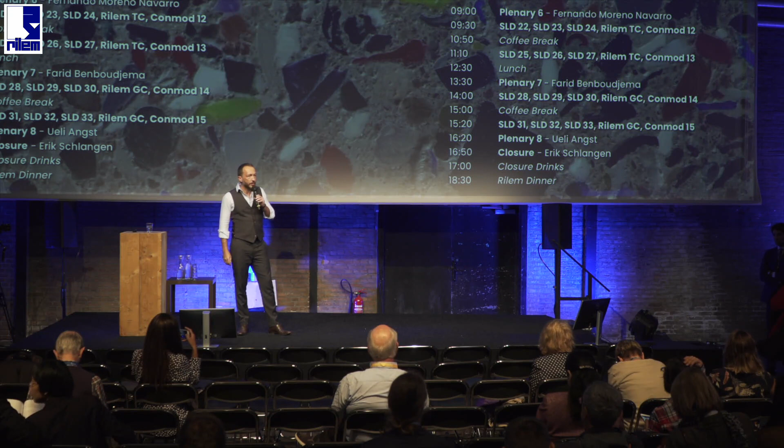It's a very special lecture for RILEM because it's given by the 2018 L'Hermite Medalist. In RILEM we have 3 major awards attributed on scientific criteria. Two of them are the Colonnetti medals, attributed to researchers below the age of 35, given during the spring meetings of RILEM. And we have the most prestigious award, the L'Hermite Medal, that will be given today. These awards are quite historical, at least for the L'Hermite medal. It has a long history of very famous names.

Today we have the pleasure of having someone who is from the asphalt and bitumen community. The cluster convener of asphalt and bitumen in RILEM made me notice the other day that it was the first time we have someone from the asphalt and bitumen community receive this award. Although we had some amazing experts in RILEM, it's the first time it's given to someone from this community. And it can be noted that this year in the jury of the medal there was no one from the asphalt and bitumen community, so it was attributed by people from cement, which tells a bit about how outstanding the academic production of this year's L'Hermite Medalist is.

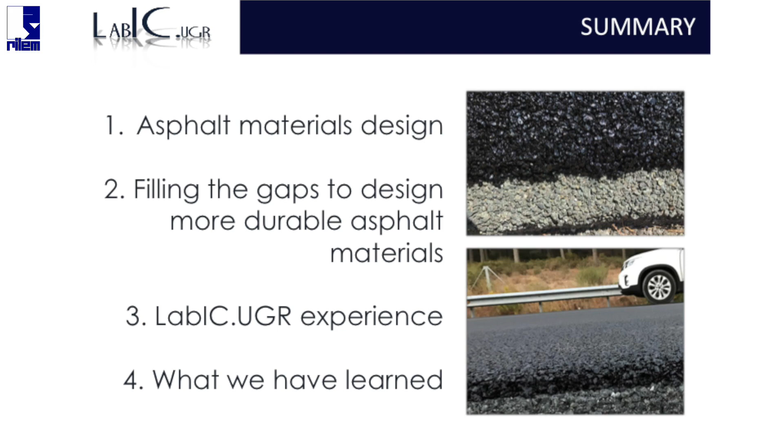The title of my presentation is Designing More Durable Asphalt Material, and the structure will be divided into 4 different sections. As an introduction, we are going to talk about asphalt material design. Then I'm going to tell you how I have tried to fill the gaps to obtain more durable asphalt material. After that, we are going to tell you about some of the experience carried out on this issue in the Laboratory of Construction Engineering of the University of Granada, where I work. And finally, as a conclusion, we are going to talk about what we have learned from that experience.

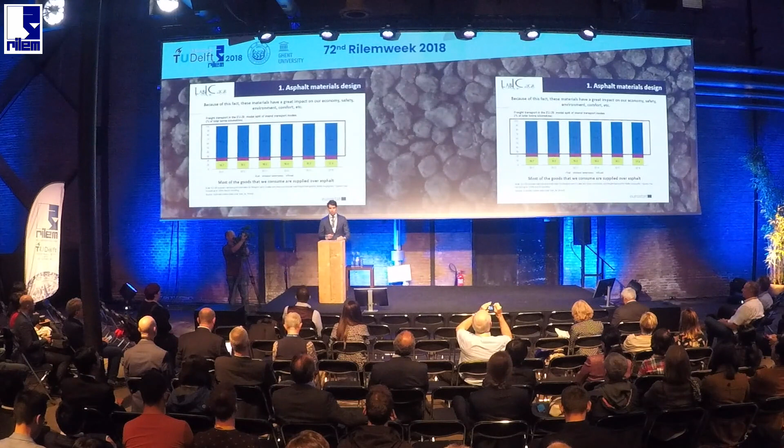We use asphalt materials every day, even without realizing it. Most of the pavement infrastructure that supports our social and economical development is constructed using this type of material. Indeed, more than half of the urbanized surface in developed countries is covered by asphalt. So it can be considered one of the most important construction materials, and because of this fact, it has a great impact on our life.

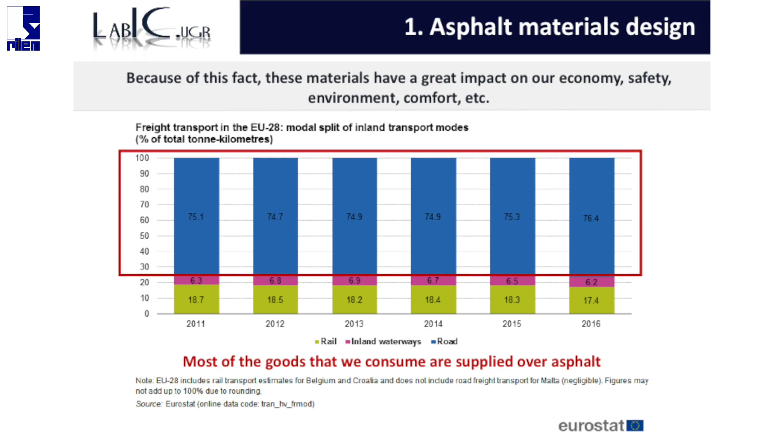Most of the goods that we consume arrive to us over asphalt. Our countries invest a lot of money every year on this material. It has a great impact on our safety every day and also on our environment. So for us, it is crucial that asphalt material offers good performance and also good durability.

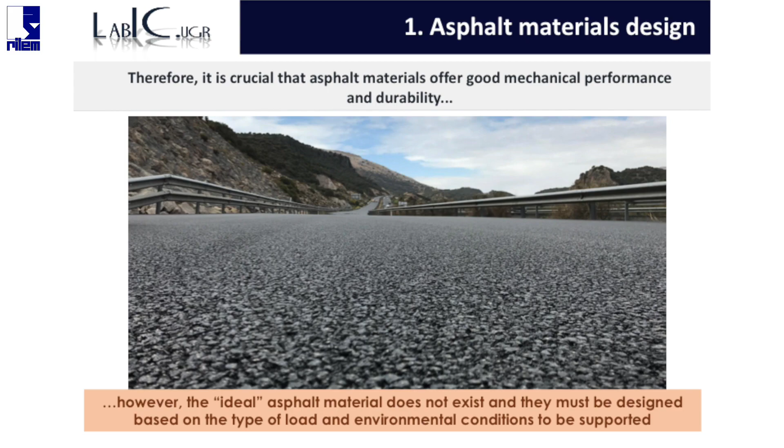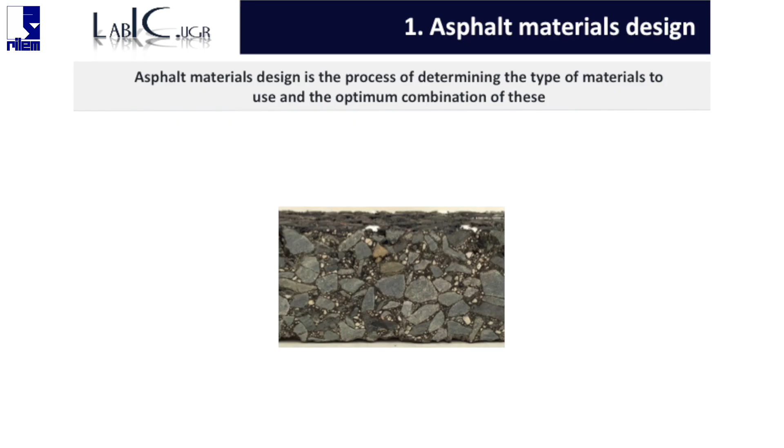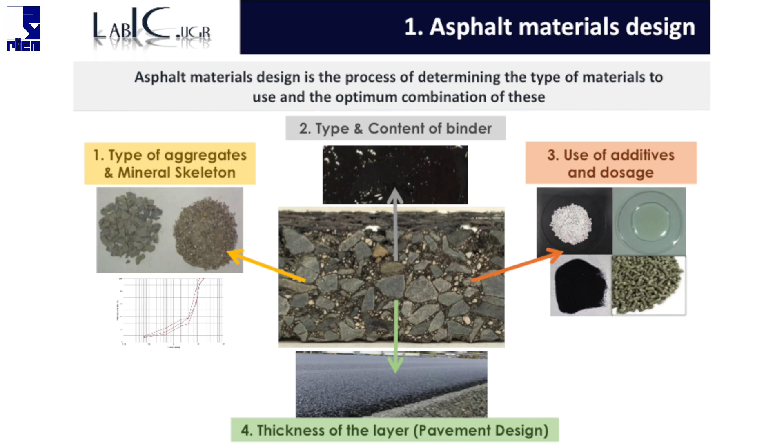Nonetheless, the ideal asphalt material does not exist, so it must be designed based on the type of load and environmental condition to be supported. To design asphalt material is the process of determining the type of material to be used and the optimum combination of materials. Basically it can be divided into 4 different steps: to determine the type of aggregate and mineral skeleton to be used, to define the type and content of binder, to decide whether to use any additive or dosage, and finally to determine the thickness of the layer. It seems a simple task, but indeed it is not, because all these variables are related, and the relationship between them is not univocal and depends on many external factors.

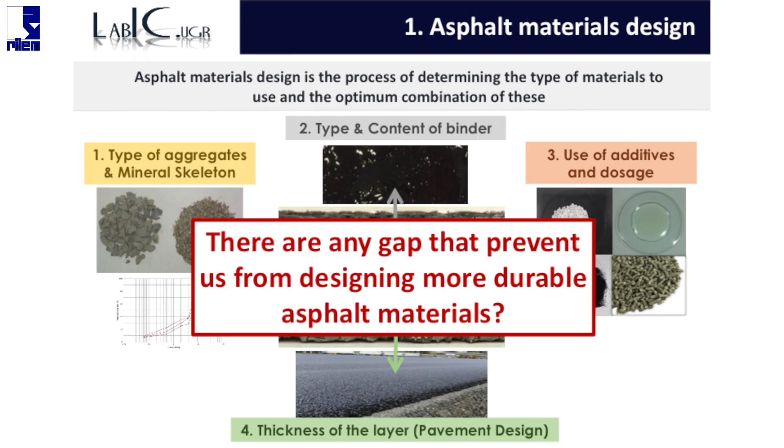Several years ago, when I started to study asphalt material, I wondered if there were any gaps preventing us from designing more durable asphalt material during the design stage. And the first thing that I noticed is that most of the loads supported by asphalt material during the service life are cyclical loads that after a certain number of repetitions cause their failure.

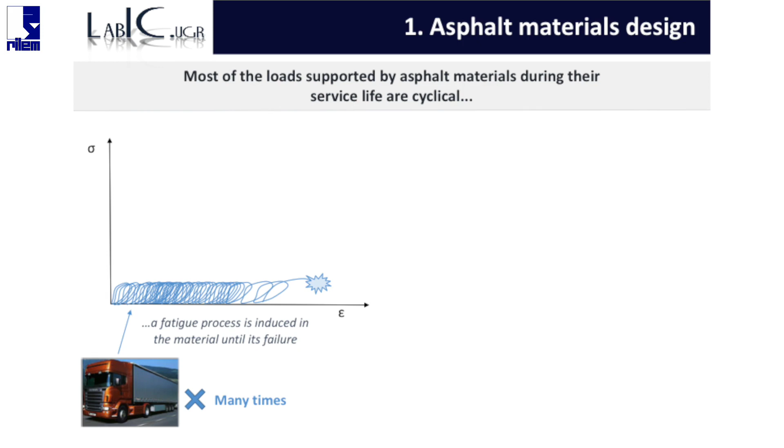Nonetheless, most of the tests used during the design stage apply monotonic loading. These tests are useful, but sometimes they are not sensitive enough to justify small increments in the binder content or the use or not of additives and modifiers.

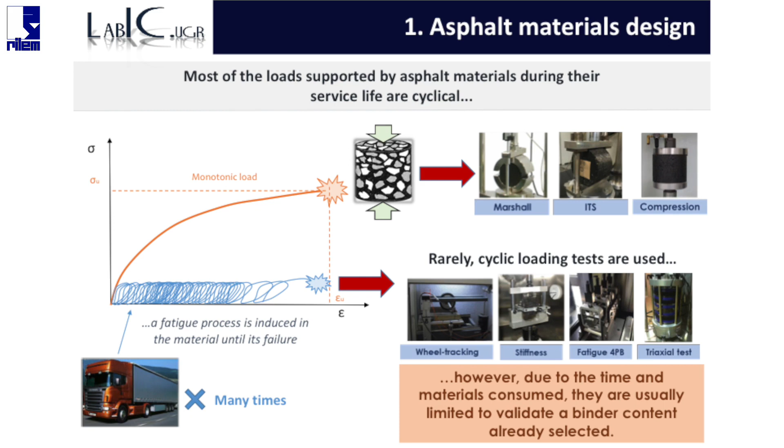Rarely, cyclic loading tests are used during the design stage, and due to the time and material consumed on this type of test, they are usually limited to validating a binder content already selected with monotonic tests.

In addition, most of the tests used when designing asphalt material do not apply similar complex effort to those supported by this material during their service life. Most of the tests apply single efforts such as bending, tensile, or shear, but not a complex state like shear plus bending or plus tensile, as occurs in asphalt material.

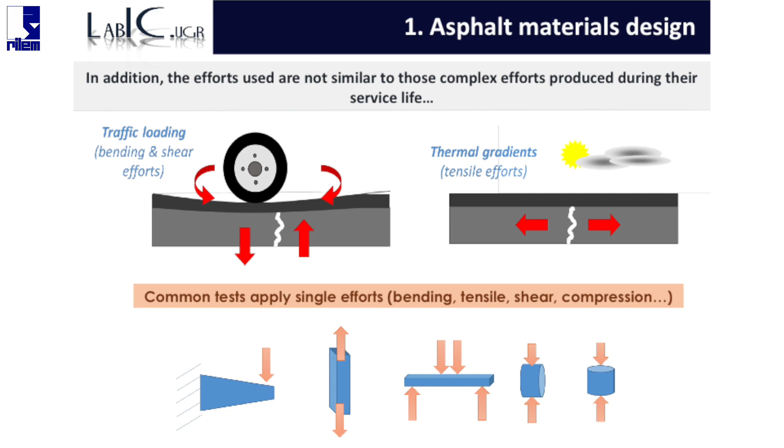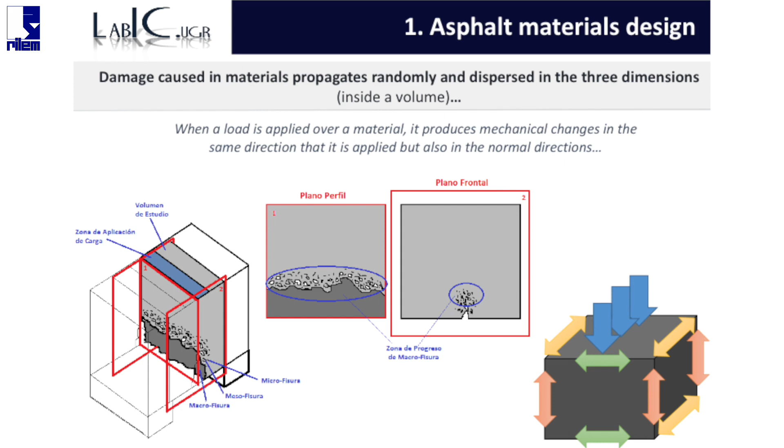Materials do not have a unidirectional propagation of damage. When you apply a load over a material, it will respond with mechanical change in the same direction as the load, but also in the normal direction. Because of this, damage propagates randomly and aleatorily inside the volume of the material.

Nonetheless, most tests measure the change produced in the material in just one direction. Because of this, it is not possible to have an accurate measurement of the propagation of the damage. These aspects reduce the repeatability of the test and also reduce its sensitivity to changes in the material design.

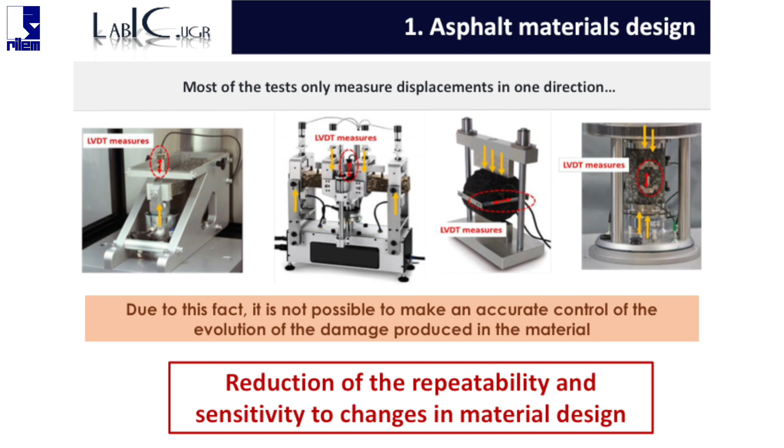Another aspect that prevents us from having an accurate measurement of the propagation of damage in asphalt material is that most analysis of results uses linear elastic mechanics. Asphalt materials are far from behaving like a linear elastic mechanic.

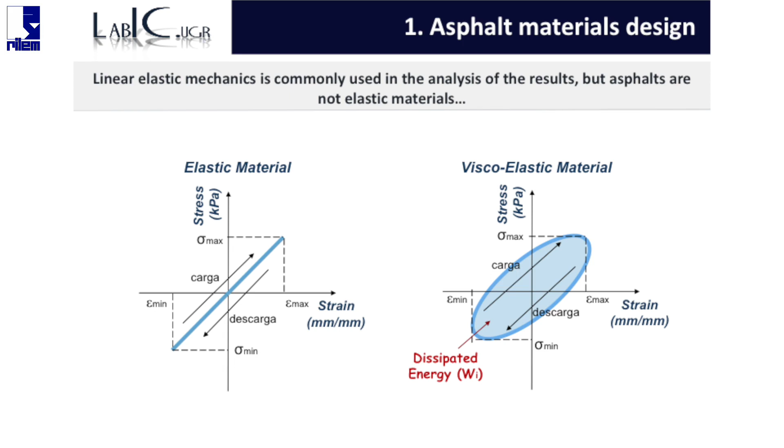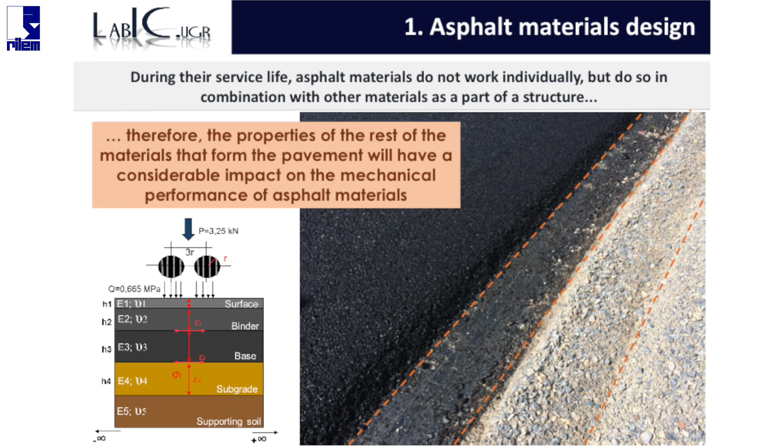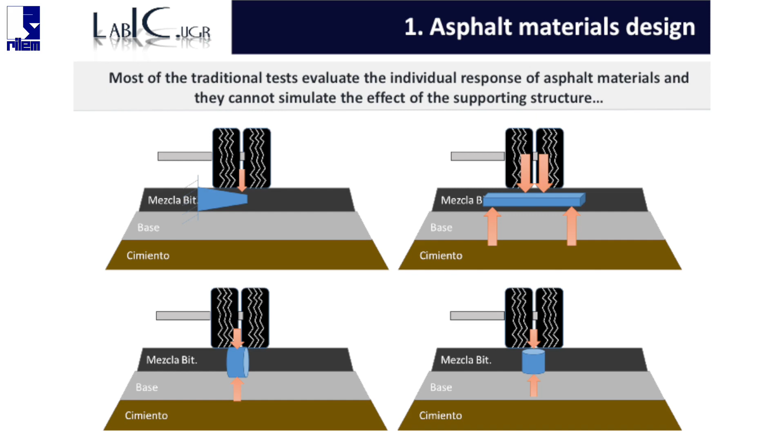In the end, I noticed that during their service life, asphalt materials do not work individually. They form part of a complete structure, and the properties of the other materials in the structure have a great influence on the final mechanical response of asphalt material. Most traditional tests evaluate asphalt material as an individual material without taking into account the effect of the supporting structure.

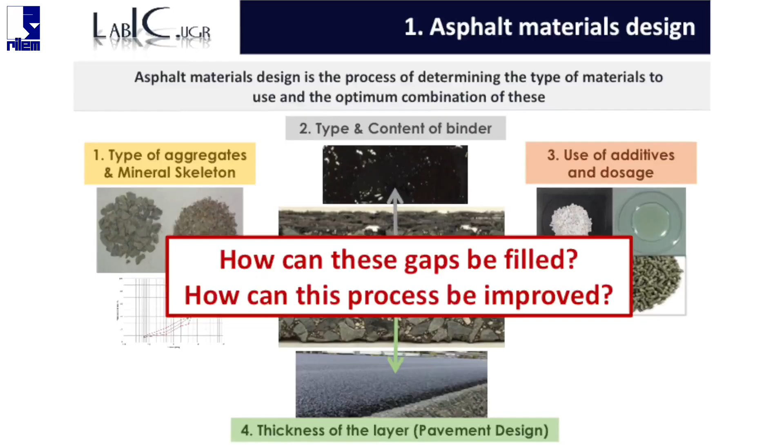So when I finished this analysis, I wondered: how can this gap be filled? Or put another way, how can this process be easily improved? I decided to develop the University of Granada Fatigue Asphalt Cracking Test.

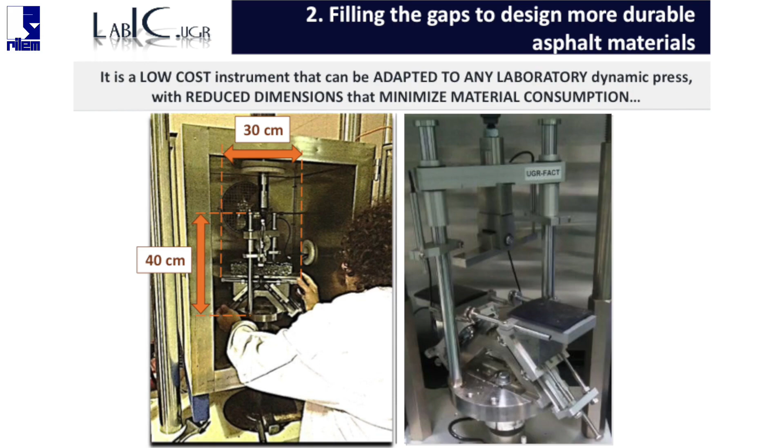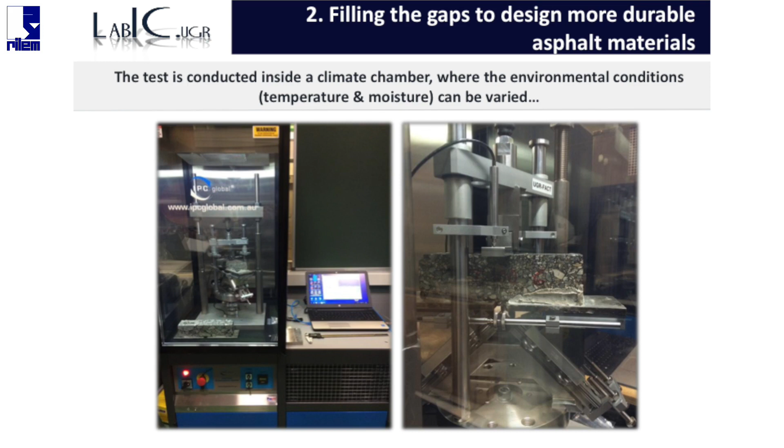This is an instrument. This is a low-cost instrument with reduced dimensions that can be adapted to any laboratory dynamic press, and it has low material consumption. The test is carried out inside a climatic chamber where the environmental conditions of the material can be changed, and it can reproduce similar complex effort to those produced in asphalt material during their service life.

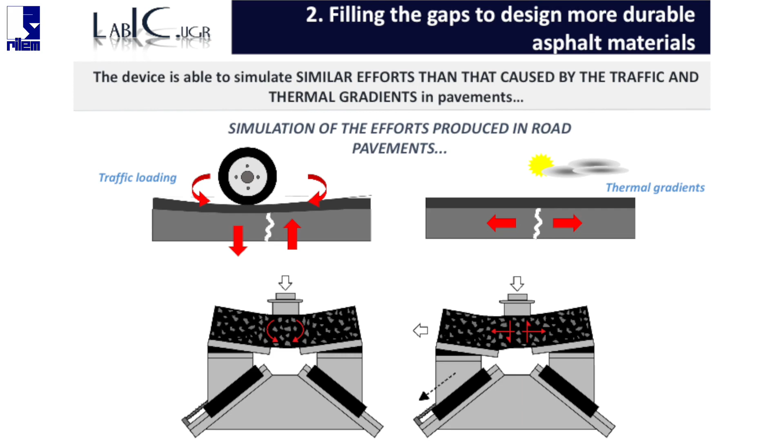For this purpose, this test is composed of a base where two supports are placed, and over that support there are two places where the specimen is fixed. Under that place there are two elastic elements that, when we apply a load like a traffic load, allow for the bending of the asphalt material.

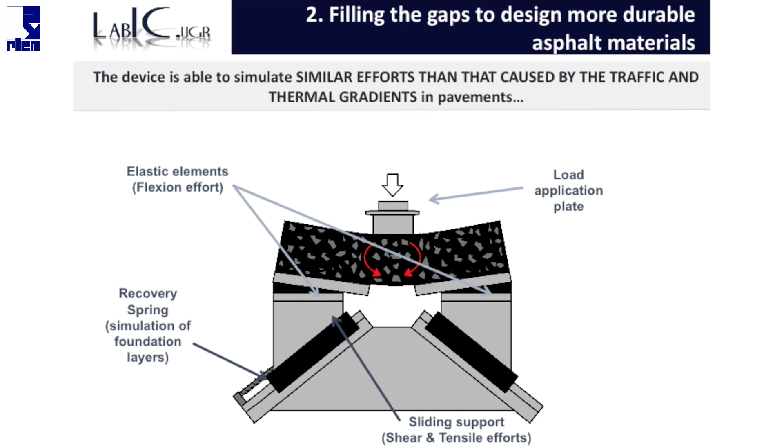After that, one of the supports is fixed and the other one can move. So when the bending moment is reached, the sliding support moves, inducing shear and tensile effort inside the volume of the material that we are evaluating.

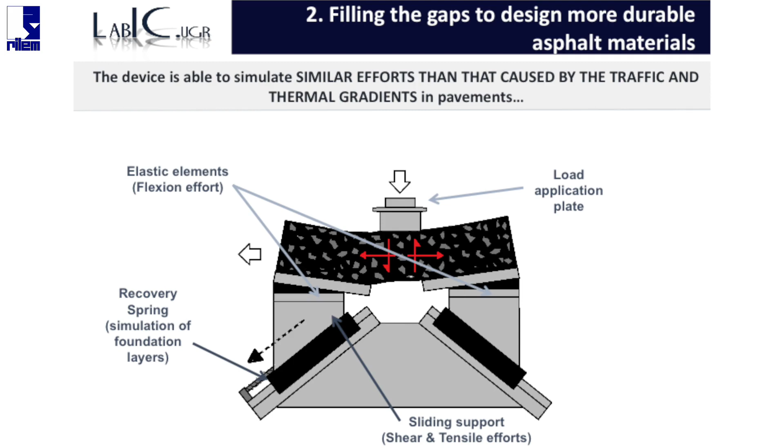We have a recovery spring that simulates the foundation layers in the material. So basically, this is an overview of the University of Granada Fatigue Asphalt Cracking Test. Here you can see the elastic elements, the recovery spring, and the sliding support.

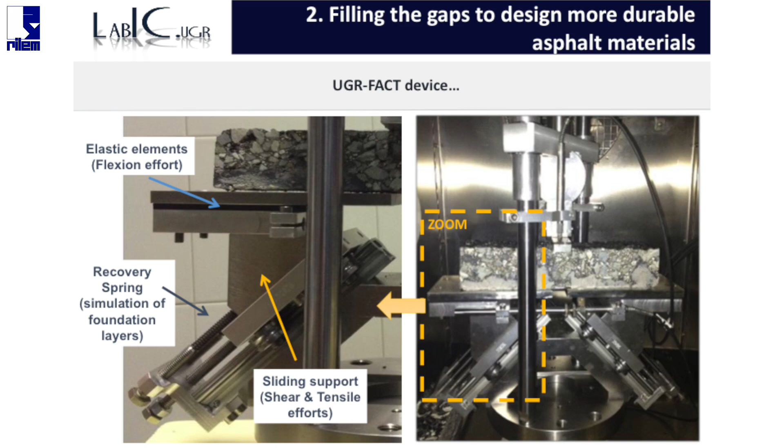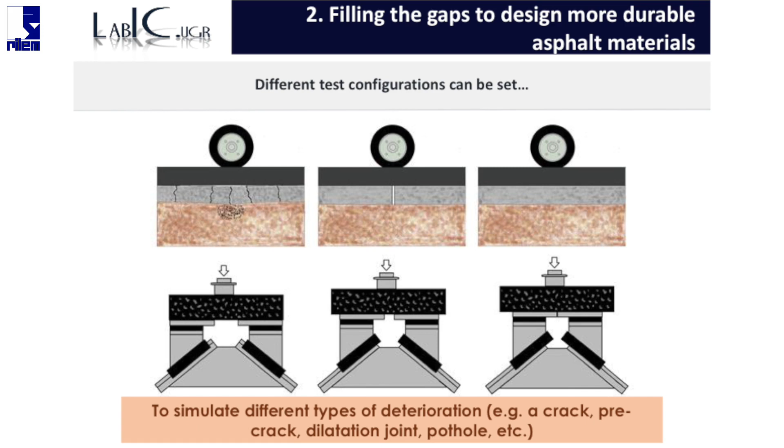The test can have different types of configuration by varying the distances between the plates, so we can simulate different types of deterioration under the asphalt layer, like cracks, pre-cracks, dilatation joints, potholes, etc. In addition, the presence of the recovery spring allows us to simulate different types of base and foundation material.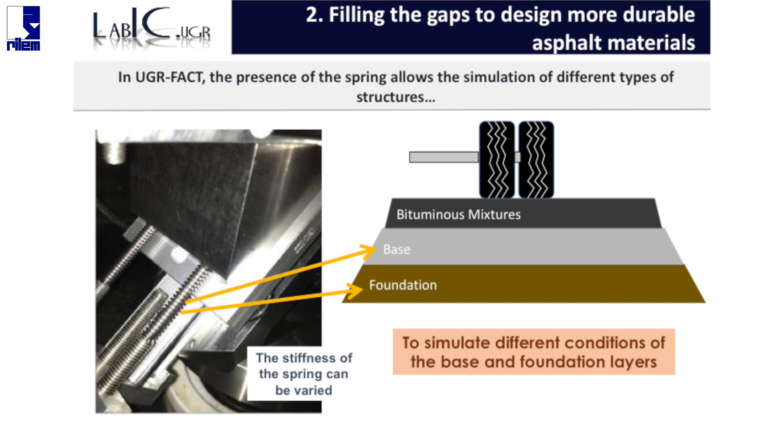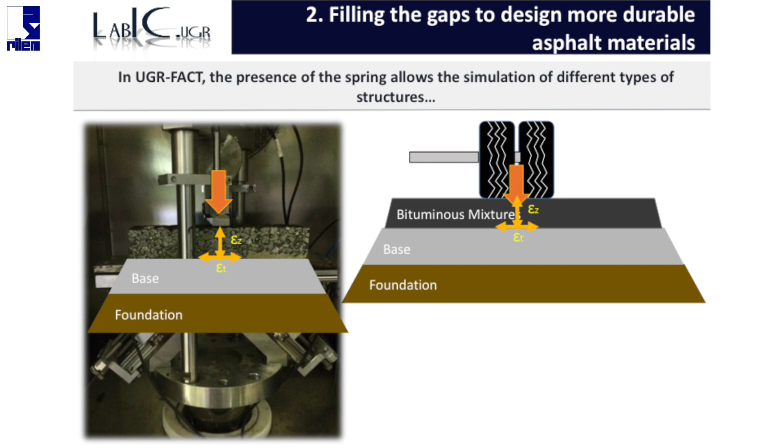So when we apply loads on our material, as occurs normally, we are going to have deformation on it. But if the characteristics of the foundation change—for example, we have a weaker base or a weakened foundation layer—the deformation becomes bigger. So the only thing we need to do is change the stiffness of the spring, and we can reduce and simulate different types of bases.

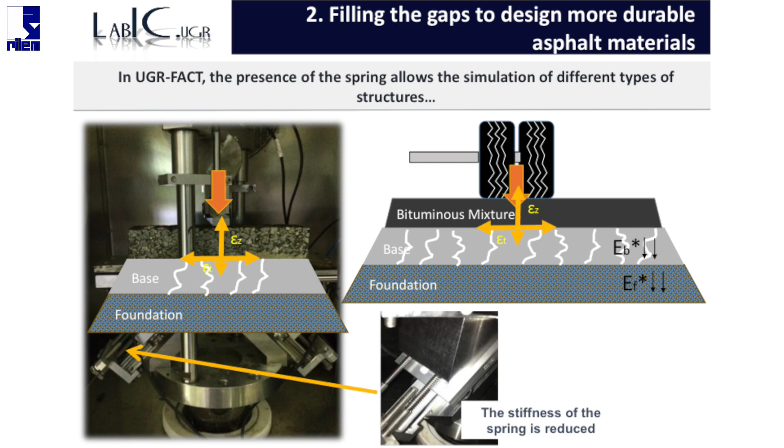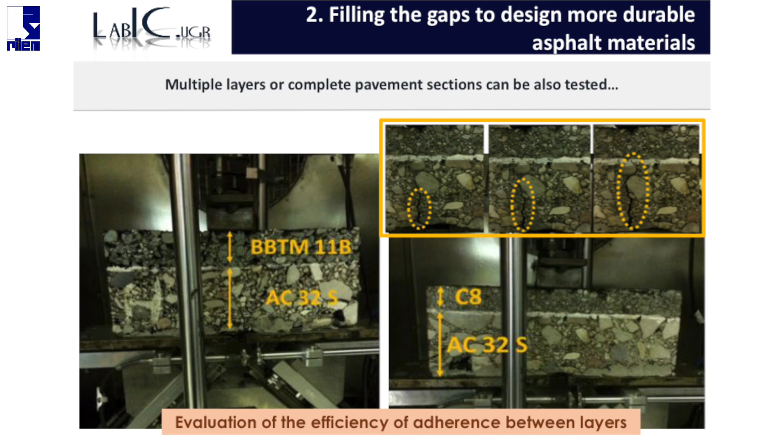This type of test also allows us to evaluate a complete pavement layer or several layers of the pavement, evaluating the efficiency of the adherence between layers, and also the use of geotextile or other reinforcing materials between the two layers of asphalt.

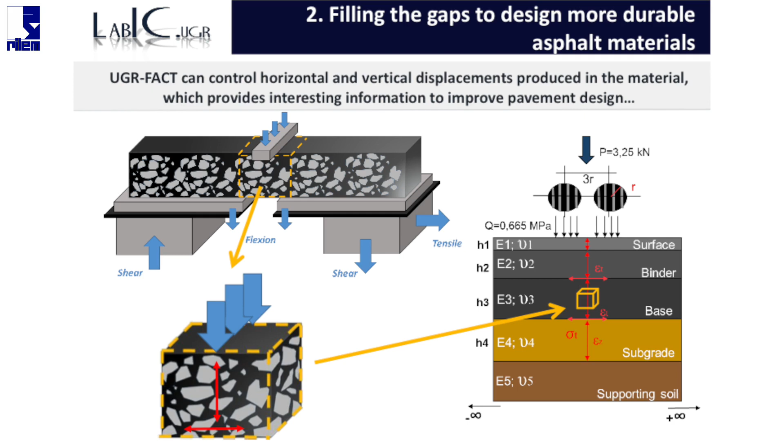In addition, it offers very valuable information for improving asphalt material design in a structural way, because we record every horizontal and vertical movement produced in that volume due to different types of load and base characteristics.

For this purpose, the UGR FACT is provided with 4 LVDTs. Two of them measure the displacement produced in the vertical direction, and the other two measure the displacement produced in the volume in the horizontal direction, one on each side of the specimen.

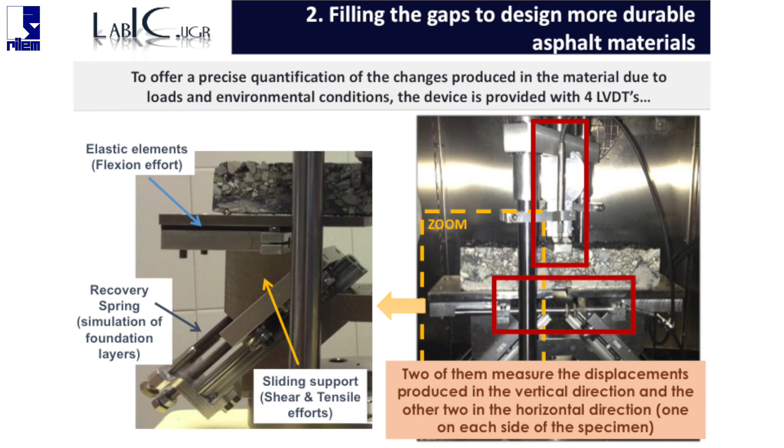This configuration allows us the evaluation of the material inside a volume, avoiding its randomness and the 3-dimensional dispersion of the damage produced in the material during the test.

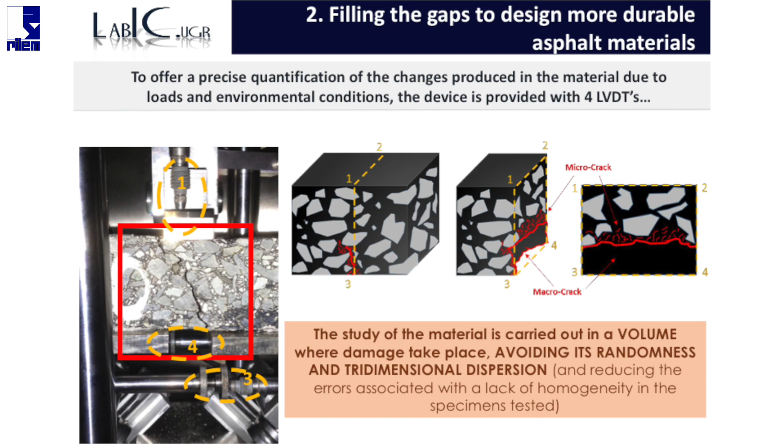Taking that information, what we do is record every relative displacement produced in the asphalt material in both directions, vertical and horizontal. These displacements are typically recorded in all types of tests and are related to the consistency of the material or the damage state. But in addition, we also record every single permanent displacement produced in the material, which is related to the change produced in the geometry of that volume.

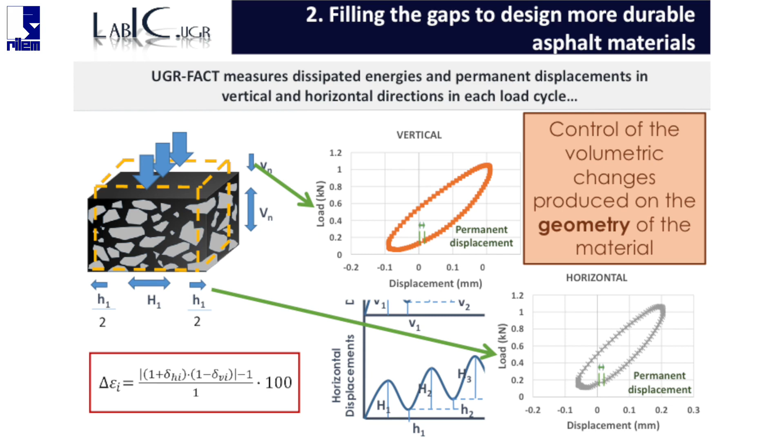By combining both pieces of information, we can obtain a control of the volumetric change produced on the viscoelastic response of the volume, but also the control of the volumetric change produced in the geometry of the material due to the permanent deformation. So combining these two parameters, we can have an accurate measurement of the real mechanical response of this material.

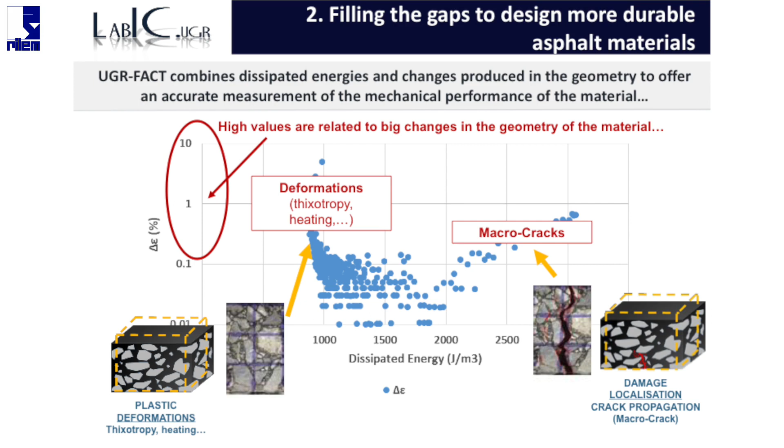For this purpose, we put on the x-axis the dissipated energy, and on the y-axis the change in the geometry. When we obtain a big change in the geometry of the volume, that corresponds at the beginning of the test to plastic deformation or other viscoelastic phenomena, and at the end of the test to macro cracks. When we obtain low values of this change in the geometry of the volume, we have a stage where microcracks, small variations of geometry, are being produced inside the volume.

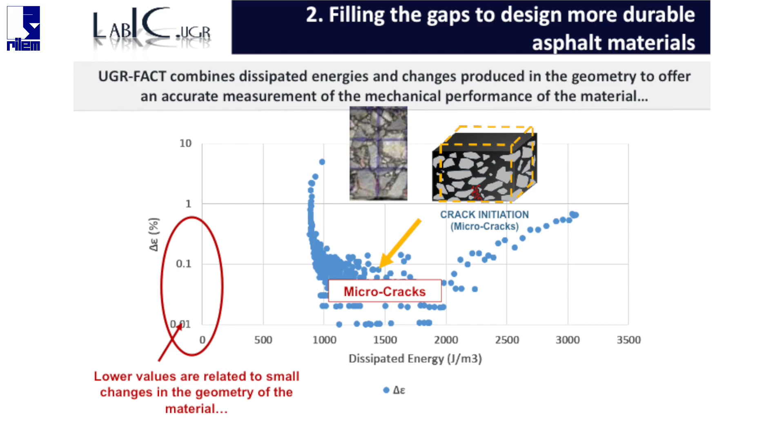Analyzing the dissipated energy, we can observe that the initial dissipated energy is related to the viscoelastic response of the material under the condition we are testing. Low values of the initial dissipated energy are related to a more elastic response, while high values are related to a more viscous behavior of this material.

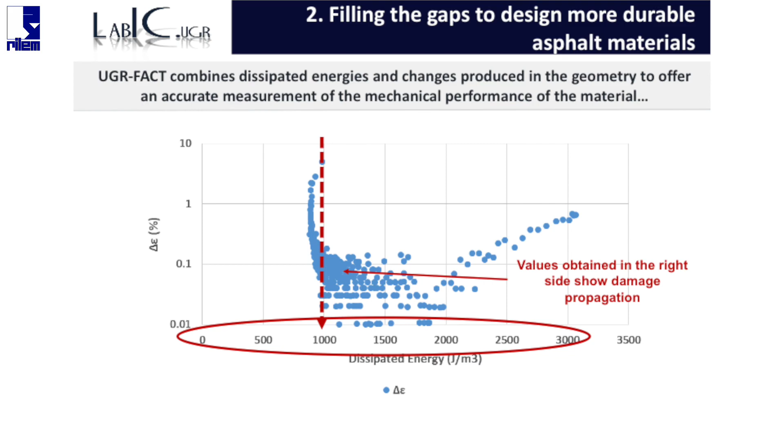During the test, if the values of dissipated energy go to the left side, toward the initial dissipated energy, we can observe that the material is suffering a strain hardening process due to plastic deformation. If they go to the right of the initial dissipated energy, that means the material is suffering damage.

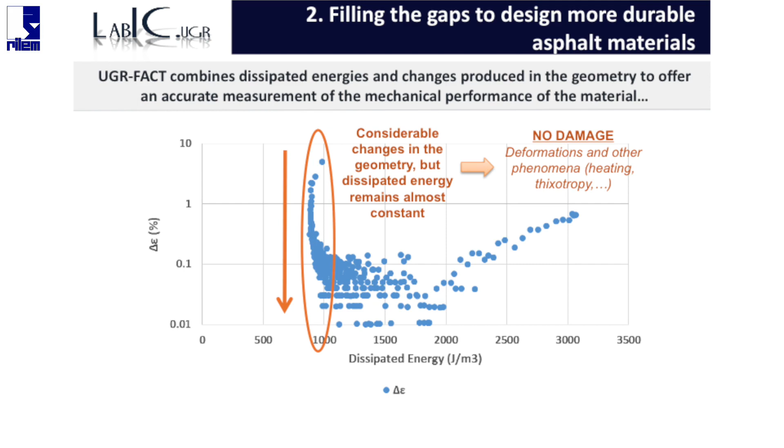Basically, at the beginning of the test in all tests, we can observe a considerable change in the geometry of the material. Consider that this is a logarithmic scale, so we see a considerable change in geometry, but the dissipated energy remains almost constant. That means there's no damage in the material, and the deformation we are controlling is only due to plastic deformation or other viscoelastic phenomena such as heating or similar.

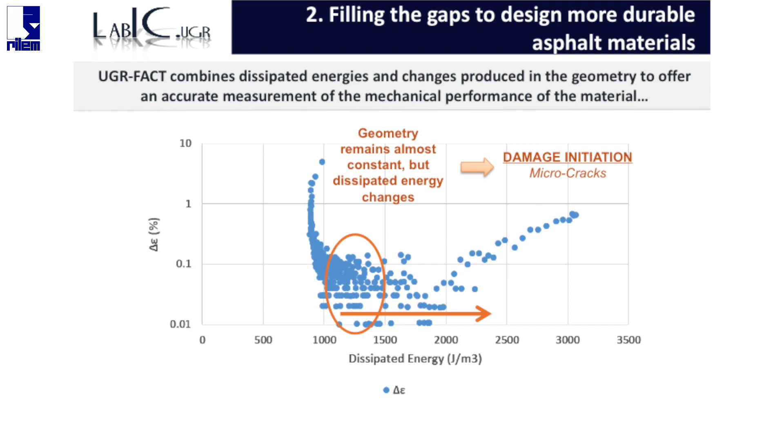Then we have a second part where the change in geometry becomes very low and the dissipated energy starts to grow. That means we are in the damage initiation phase. In the end, the last part, geometrical change starts to grow again, and dissipated energy also grows drastically. That means we have the damage propagation stage.

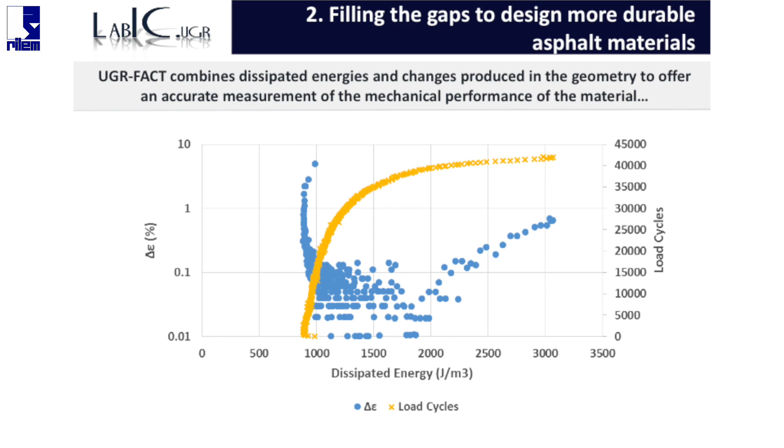If we combine this information with the number of load cycles applied that produce it, we can identify many different properties inside our material. For example, the deformation susceptibility, because we have the number of cycles that does not cause real damage to the material, just deformation. But we can also distinguish between the different phases of the propagation of real damage, the micro and the macro process.

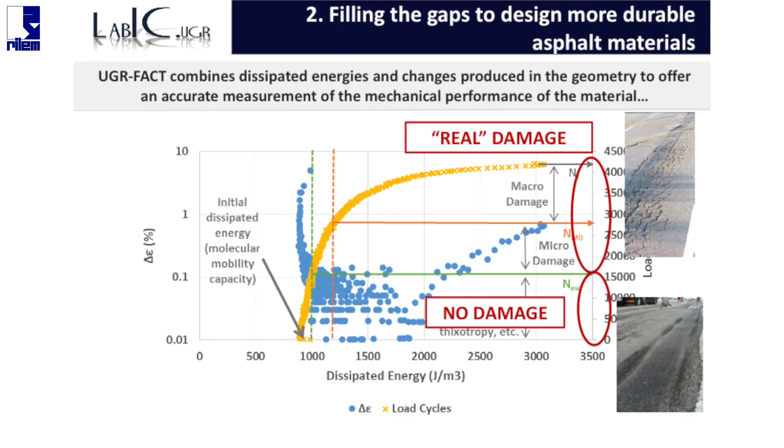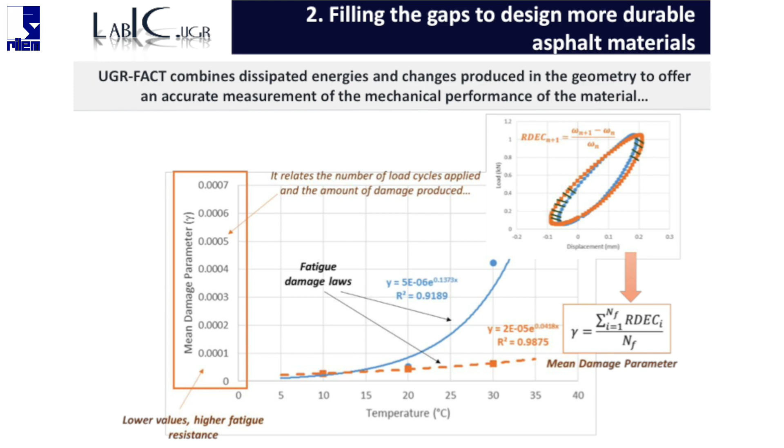Taking that information, we can define the mean damage parameter, which is a summation of the increment of the dissipated energy produced in the material during the test, divided by the number of load cycles needed. By varying the temperature condition or the load condition used to evaluate the material, we can obtain fatigue laws that help us design more accurate asphalt material.

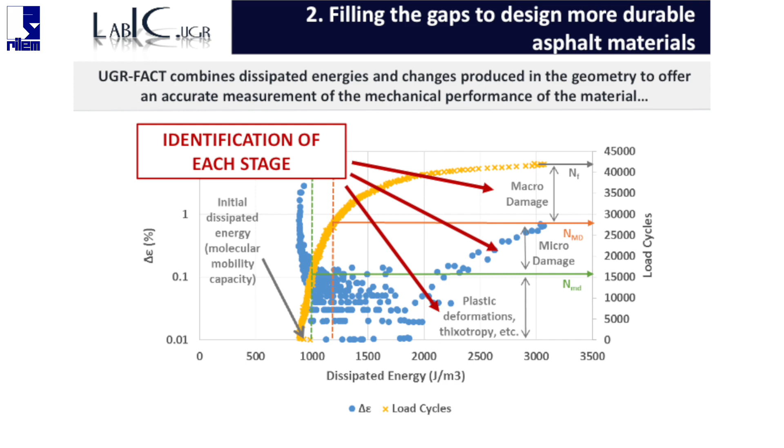So basically, with this test, we can easily identify each of the stages of the mechanical performance of the material and use them to identify the benefits produced by additives or bitumen modifiers in each of those stages.

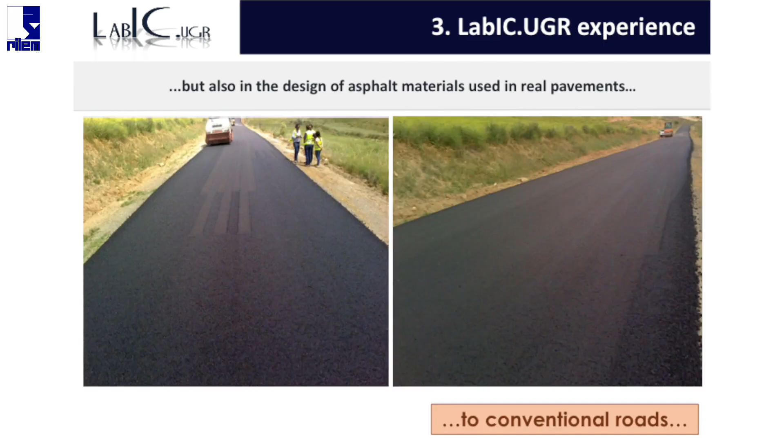The Laboratory of Construction Engineering of the University of Granada has used this tool during the last 8 years successfully in fundamental research, but also in the design of real asphalt material in pavement, from urban solutions to conventional roads, and also in highways. Because of that, I will show you the potential of this tool in different stages.

Starting at the beginning, the design stage in the laboratory, I will show you the sensitivity of this test to design variables such as density, voids, binder content, binder type, or the use of additives. For that purpose, I will show you an example with a BBTM mixture, which is a common mixture used in surface layers in highways in Spain, and a Spanish standard gives the recommendation to design it.

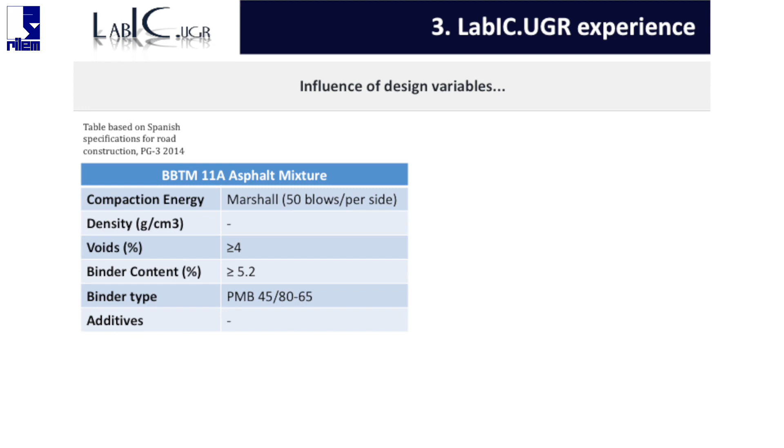The compaction energy must be 50 blows per side in the Marshall compactor. The minimal void content must be 4%. The minimal binder content must be 5.2%. And the binder to be used should be a polymer modified binder 45/80-65.

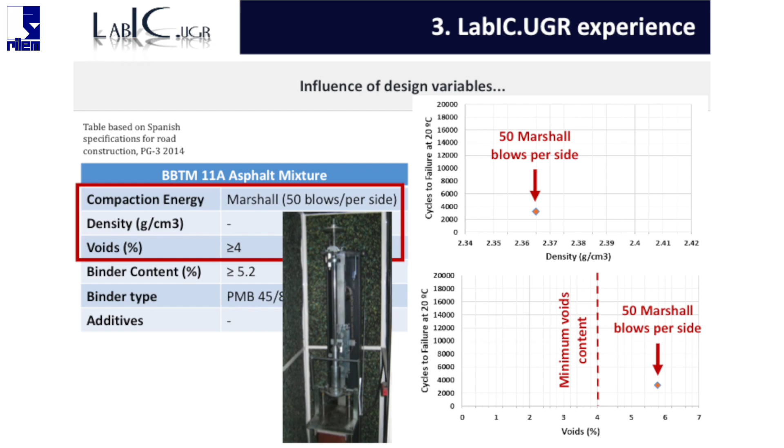If we start to design a material under that criteria, we can apply 50 blows per side, and we are going to obtain a material that has around 6%, for example, that accomplishes the criteria, with a density and a resistance in the fatigue asphalt cracking test of around 3,000 cycles.

That's okay, but if we change the compaction energy used in the material, it is observed that as the density increases, the mechanical resistance of the material increases. That means not all asphalt materials, not all additives, will have the same compaction energy. So we need to focus on trying to obtain the maximum density while respecting the void content of the material. Just by changing the void content of the asphalt material by 2%, we can increase its service life by 70%.

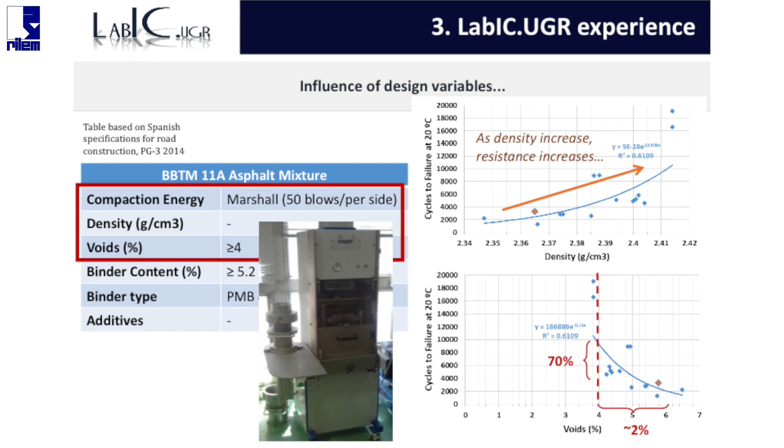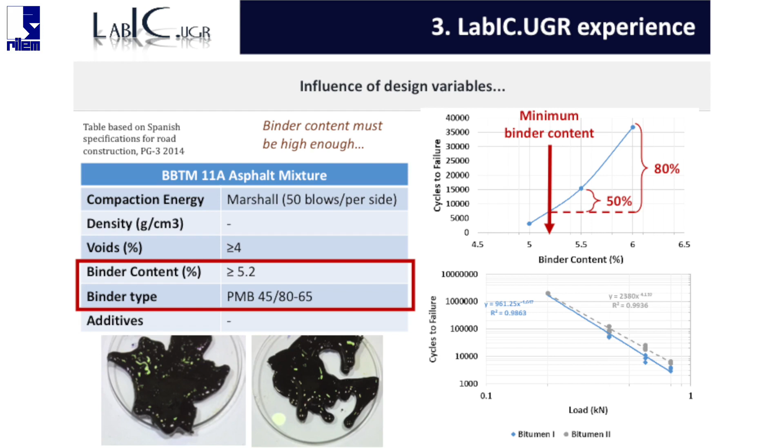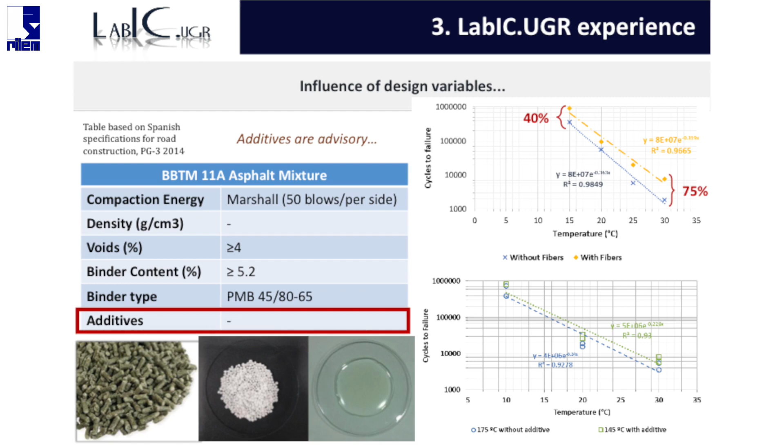In the end, additives are usually not advised when designing asphalt material because it increases the cost. But definitely, if you use additives like fibers, you can drastically increase its mechanical performance and service life. Also, if you use other additives like waxes or surfactant materials, you can reduce the manufacturing temperature while still obtaining good mechanical performance, because the material improves its workability and can be densified in a better way.

The second potential that I want to show you from this test method is that it is very useful to determine the thickness of an overlay or the thickness of a pavement layer to be used. Right now our road network is almost constructed, and we are going to have many activities on the rehabilitation of this type of road.

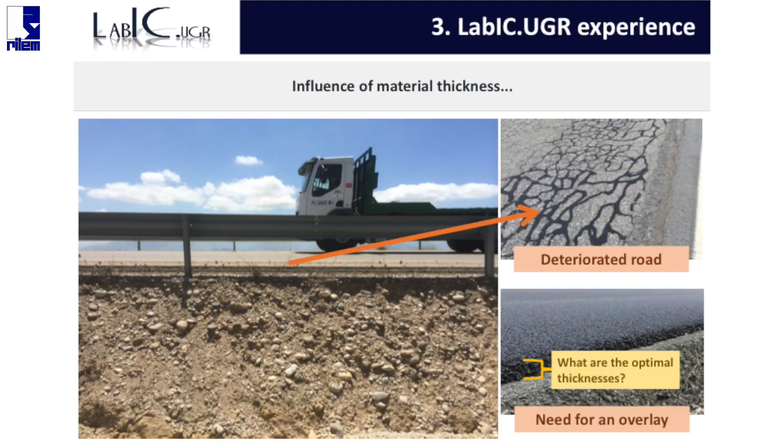We are going to have a deteriorated road that needs an overlay. But the typical question is, what is the optimal thickness to be used, or which is the optimal material? What we do is determine the type of load the road will support, and the characteristics of the road. Then we can adapt that to the University of Granada fatigue asphalt cracking test, and test different types of materials and thicknesses at different temperatures in order to obtain the optimal thickness to be used.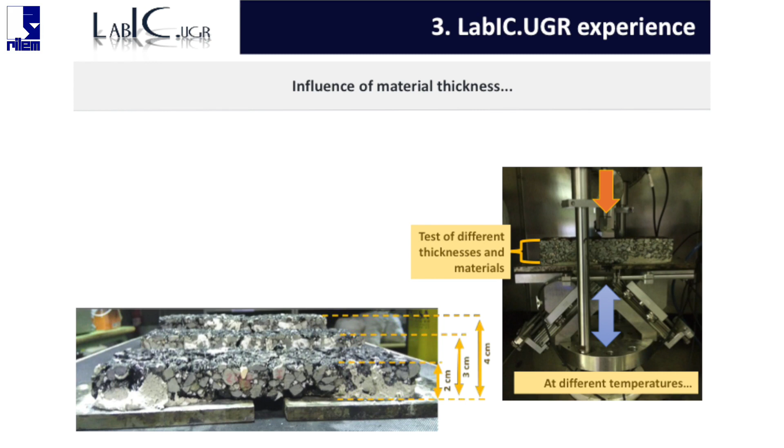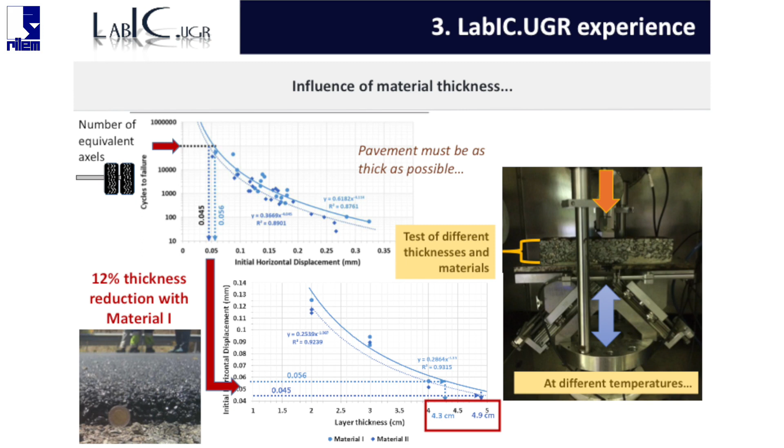For sure, if you want a durable asphalt pavement, it must be as thick as possible. Nonetheless, when comparing between two types of material, you can obtain a significant reduction in thickness when using one material or the other, which gives us another criterion to select the optimal material during rehabilitation.

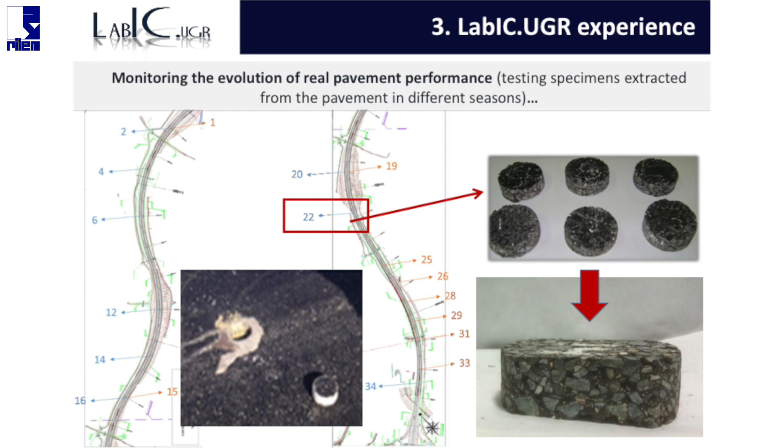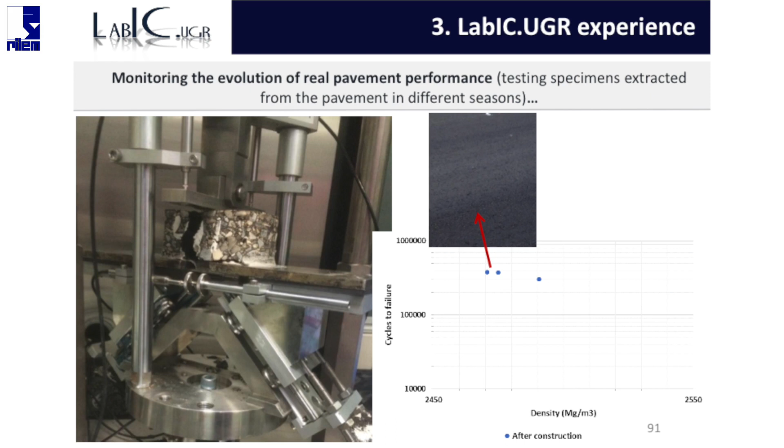Finally, another interesting application of this test is monitoring the performance of the asphalt layer constructed on a real road. For that purpose, we organize different campaigns of coring. We take cores at different seasons from the road and evaluate them in the fatigue asphalt cracking test. We determine the fatigue life after construction, and then after different periods, like, for example, after 4 years, we obtain the different reduction in fatigue life.

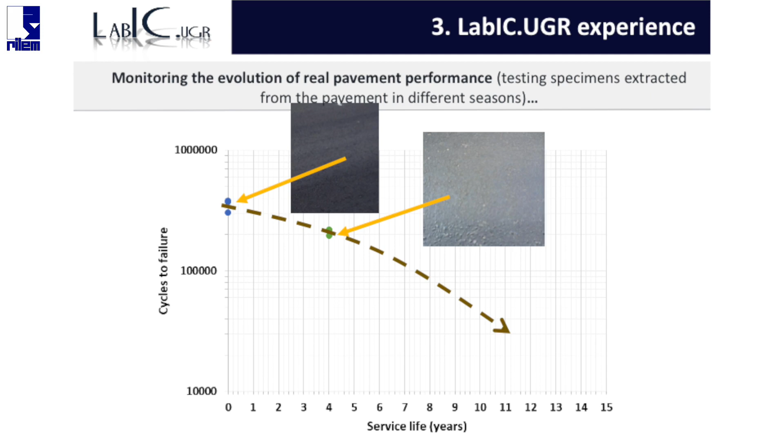Setting that in a graph of service life in years versus pavement performance measured through cycles to failure of the cores, we can determine the evolution of the mechanical performance of that real road in order to determine when is the optimal period to act.

At the end, as a conclusion, if you want a recipe to design more durable asphalt material, I should say that it does not exist. There is no global recipe to be applied. Nonetheless, based on our experience, I can give you some recommendations.

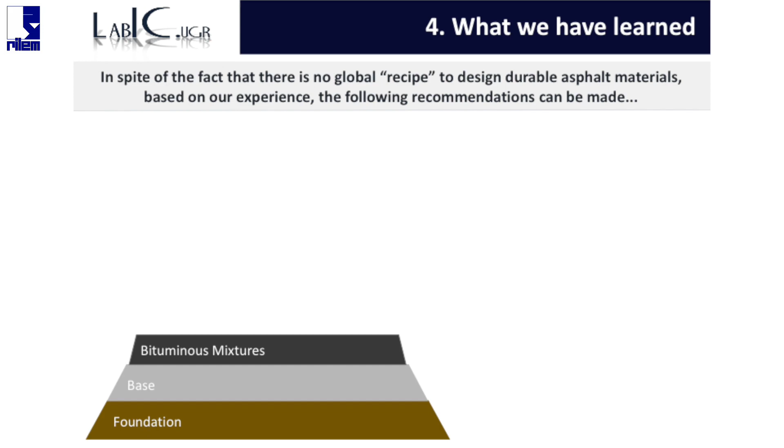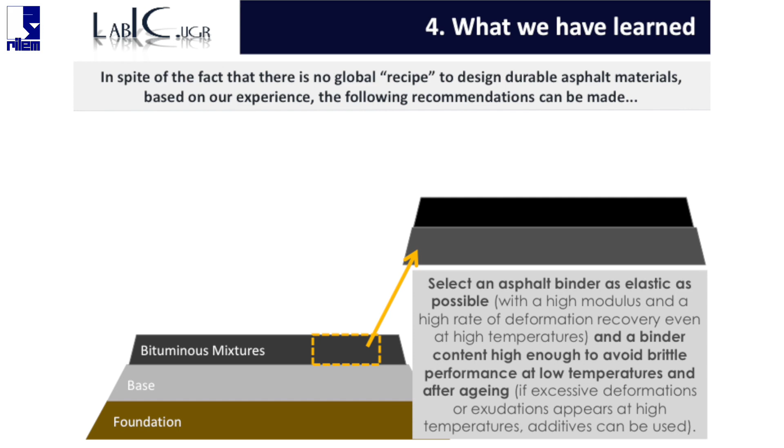The first one is to select an asphalt binder as elastic as you can, with a high modulus and a high rate of elastic recovery. In addition, the binder content should be high enough to avoid brittle performance at low temperature and after aging. With this criteria, we can have small deformation even at high temperature and low cracking risk even at low temperature and after aging.

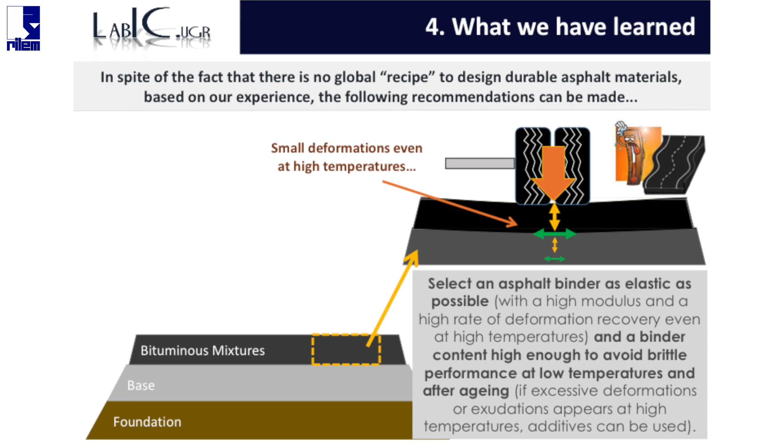After that, we need to design it as dense as possible. For that purpose, we can use additives that improve the workability of the material, which help us reduce the risk of plastic deformation, cracking, and environmental attacks.

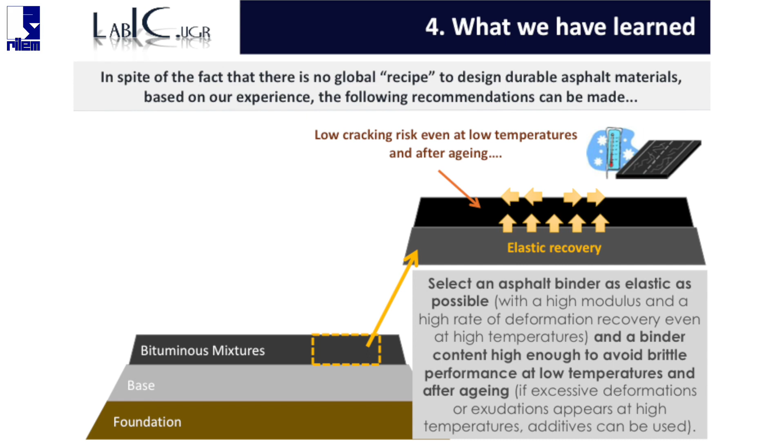And finally, use pavement as thick as possible, but overall, try not to put an asphalt layer over another layer which is softer than the top one. If we use a very stiff layer over a softer one, the deformation in the bottom layer can be higher than in the top layer, so the deflection becomes higher. The top layer cannot go with the bottom layer, and it will crack.

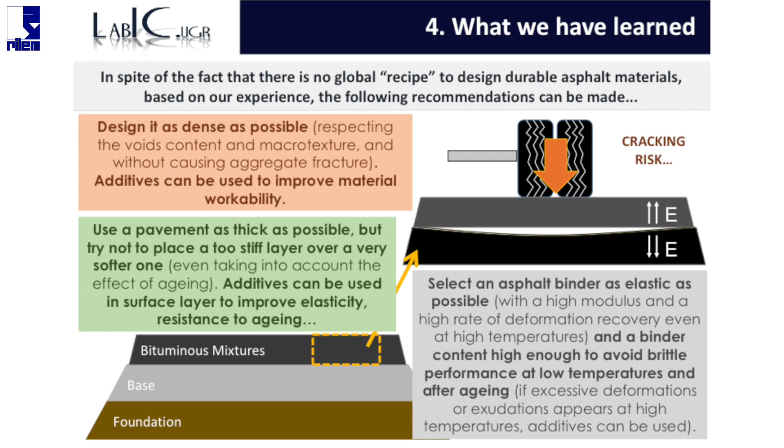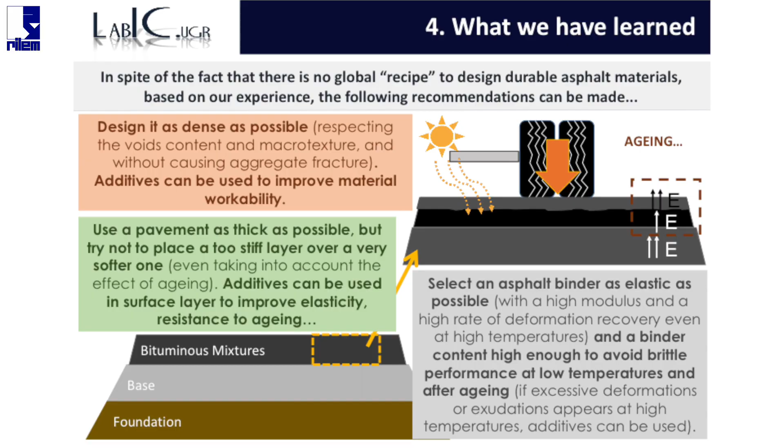This phenomenon also happens when we have aging. Even with a single layer, when aging comes, the stiffness of the top part of that layer becomes much stiffer, and then this type of cracking appears. For this purpose, we can use additives in the surface layer to improve its elasticity and resistance to aging.

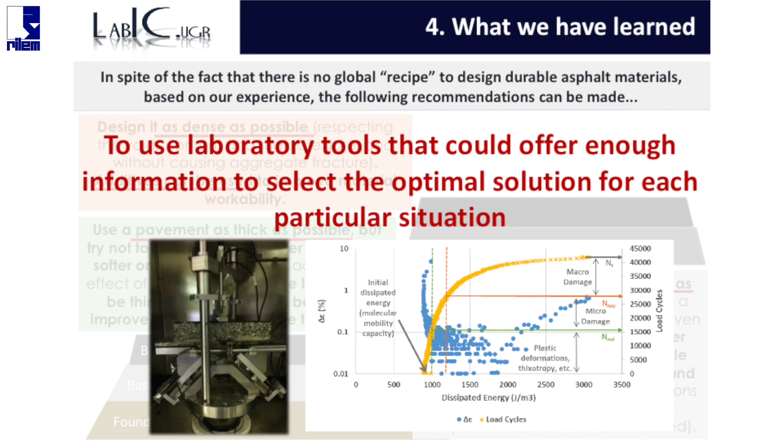Nonetheless, what can we do if our recommendation cannot be followed? Anyway, there are many variables that will influence this. What we need to do is use laboratory tests that can give us as much information as possible from that material, and try to study it in the same way it will perform during the service life.

Before I finish my presentation, I must say that this method would not have been possible without the support of the Laboratory of Construction Engineering of the University of Granada team, and also the support of the companies, associations, and public administration that have supported my work. So this prestigious award also belongs to them.